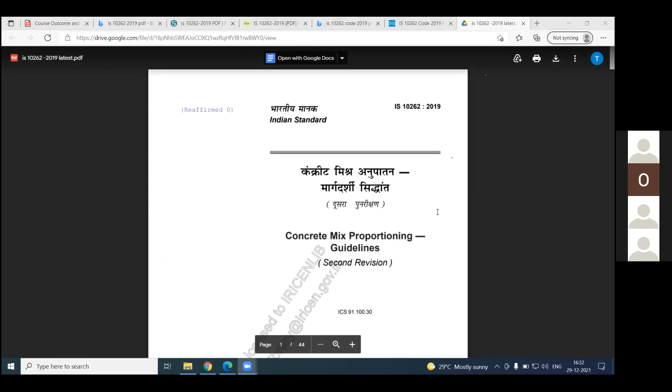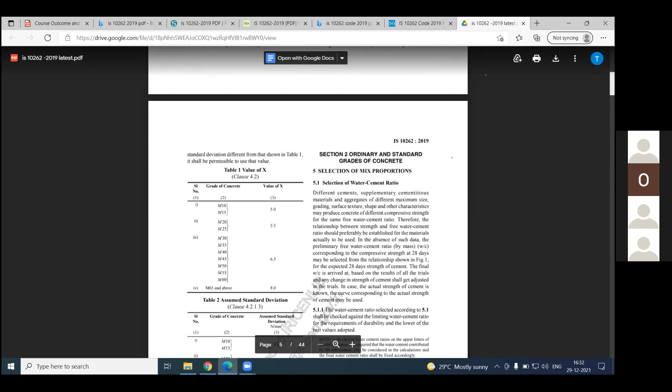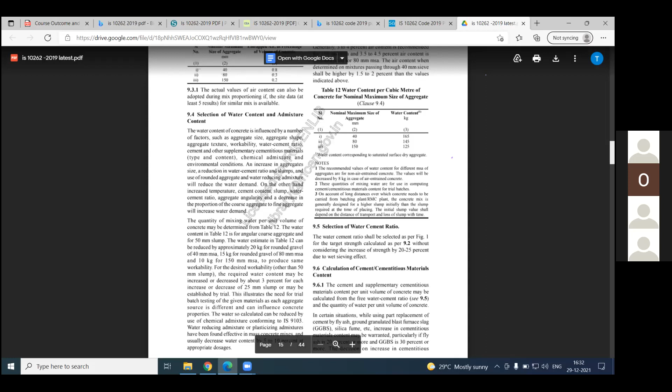Okay. For easy purposes, I have downloaded IS 10262. I will explain so you people can see easily. Wait a minute. I will show the main things, and the background things I will explain. Okay.

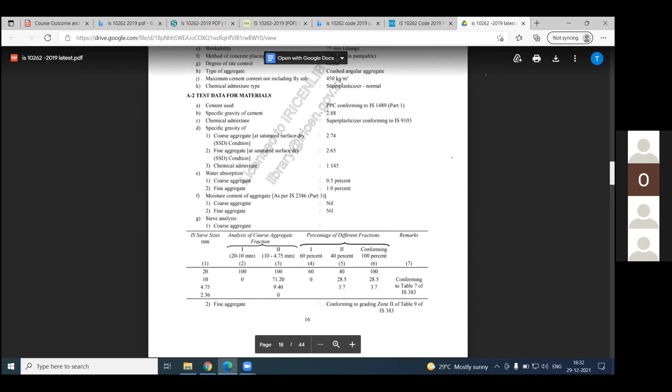Yeah. This is the main process for designing the mix design. First, we have to select the grade. After that, what type of cement we have to use, what is the maximum size of aggregate, whether it is heavily reinforced or not, and what slump is required. Slump will depend upon the time at which we have to pour the concrete, like 1 hour, 2 hours, 3 hours.

Based upon the time we can increase or decrease our workability, like slump. We can use admixtures for that. After that, what is the minimum cement content and what is the maximum cement content we have to consider. These are the main things we have to consider before going into mix design.

These are all things you will get in the IS codebook. What is the maximum cement content?

Maximum cement content we will use is 450, but in railway projects, some codebooks give a limit of 500. Minimum is 300, but it varies entirely between highway and railway. For highways, minimum cement content is 300. For railways, it is 350. It will vary.

After getting all the test reports of the materials, we should check specific gravity of the cement. We will get this for each material test parameter, including specific gravity of aggregates in SSD and saturation condition, admixture weightage, and water absorption of coarse and fine aggregate. Due to this water absorption, we can deduct or increase our water content. If there is a lot of moisture content in aggregate, we have to reduce our water content so that workability is maintained properly.

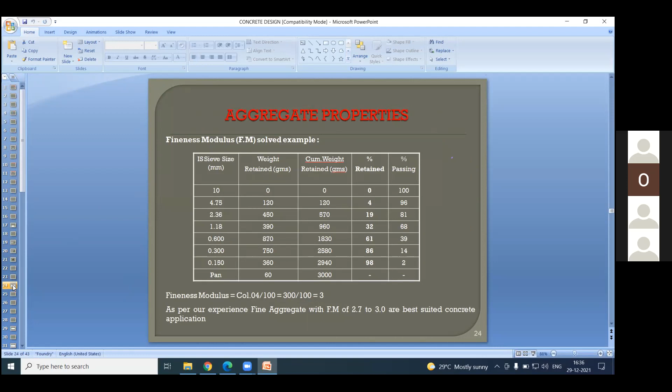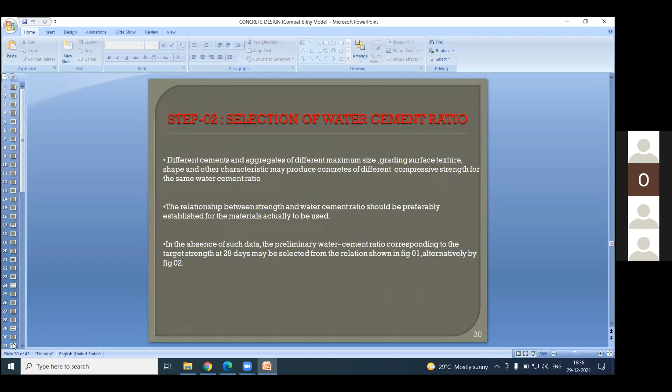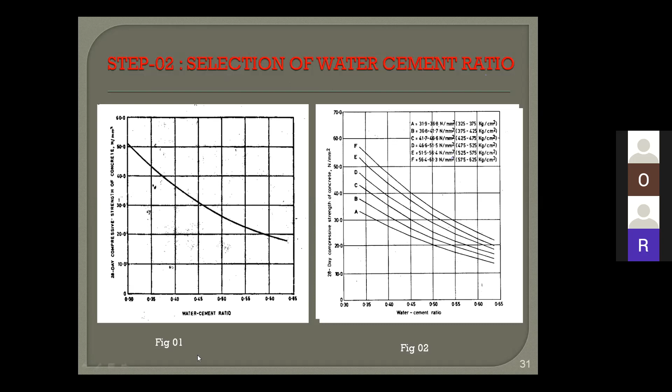The maximum water cement ratio we have to use is 0.45. Now we have the target strength of 42, and we plot it. This is the 42 we come across, and this is what we get here. After that, we go down so that we get the water cement ratio we can use. Here we get 0.38. So we fix the water cement ratio at 0.38.

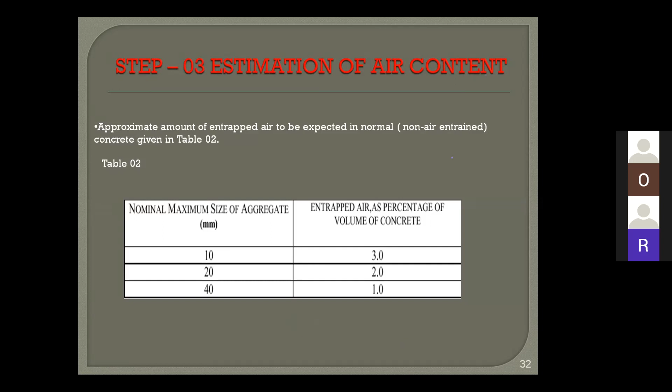Here we are using maximum size of aggregate as 20 mm. So we have to assume air content will also be there, about 2%. After that, we are assuming 20 mm as the maximum aggregate.

In the codebook, IS 10262, it is given that maximum water content we have to use is 186 liters. 186 liters is common if we are using maximum aggregate size of 20 mm; it is compulsory. But by using 186 liters alone, we cannot complete the mix design. The water content may be increased depending upon our material properties.

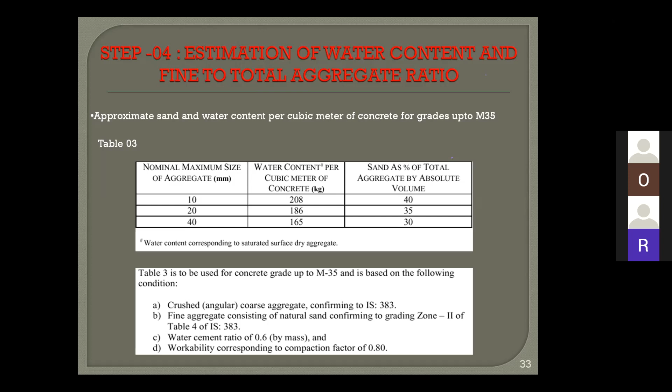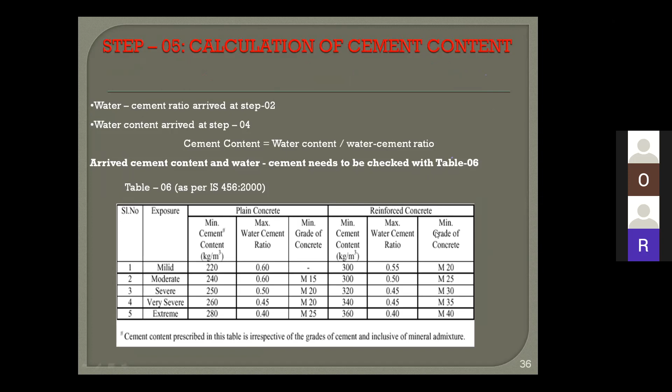These are the criteria we have to take. I have already informed you the minimum and maximum cement content for plain concrete and reinforced concrete, and their water cement ratios. These are some examples, but you can also see in some codebooks what conditions determine the type of mix design we use. These are the conditions.

Most of India is in moderate conditions, but we also have coastal regions where it is severe. For coastal regions, we design in a separate manner; the cement content and even the type of cement used will be changed.

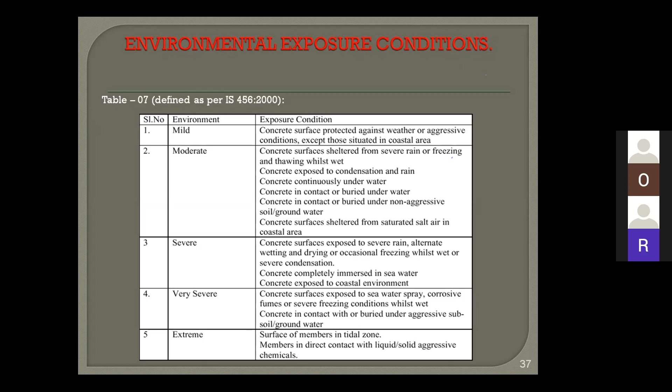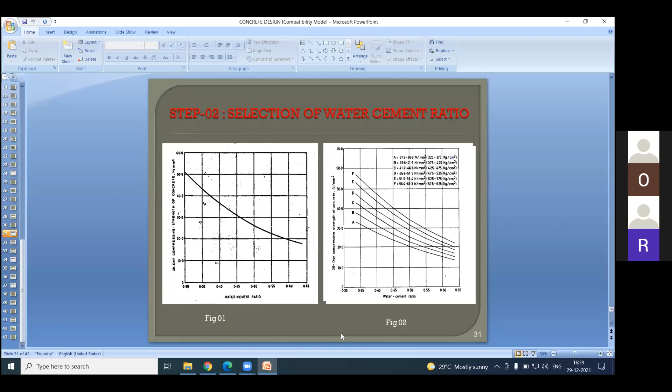Yeah, thank you. Yeah, I will come to here.

Then we have chosen the water cement ratio as 0.36 from the graph. After choosing 0.36, we have to find the cement content.

We have already got it actually. We are using 186 liters from the codebook. We got 186 liters of water we have to use for maximum aggregate size of 20 mm. You can see from table IS 10262 that 186 liters we have to use.

But this 186 liters is for 50 mm slump. If we want more than 50 mm slump, we should increase our water content so that we get more slump.

So how will we increase it? First, 186 liter is given for 50 mm slump. In the codebook, it was mentioned that for every 25 mm increase, we have to increase 3% of water. Here he wants to design for 75 mm slump, so we have to increase for that 25 mm, 3%.

So he calculated 186 plus 3 into 186 by 100. If we want 100, we should calculate 6 into 186 by 100. For every 25 mm increase, we have to increase 3% of water of 186 liters. So after calculating, we will get this value, and this is our water content.

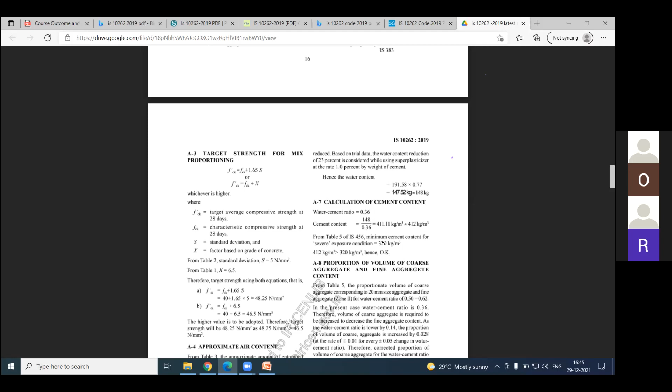You can see here 320. In some codebooks, they mention 300, 350, and maximum we are using 500, 450. It depends upon which codebook we are using and what work we are using it for. Depending upon the work also, some things will change, codebooks will change. In railways, we will use some codebooks, and compared to highways, we will change the codebooks. So we have to see all these criteria before designing a mix design.

After that we have already decided our cement content. We have decided our water content, admixture content, and cement content. Now we have to decide our aggregate, how much fine aggregate and coarse aggregate we have to use. In coarse aggregate, we are using two types: 20 mm and 10 mm. What ratios we should use, we have to calculate right now. Okay, for that purpose I will say.

Just before going into this, we have to consider we are using water cement ratio as 0.36 right now. For 0.3 we are having in IS 10262, it was mentioned that we have to calculate the volume of aggregate by using water cement ratio. But actually you can see here, for maximum size of aggregate 20 mm, for zone 2 type fine aggregate, we have to use water cement ratio 0.50 equal to 0.62. This is the condition given.

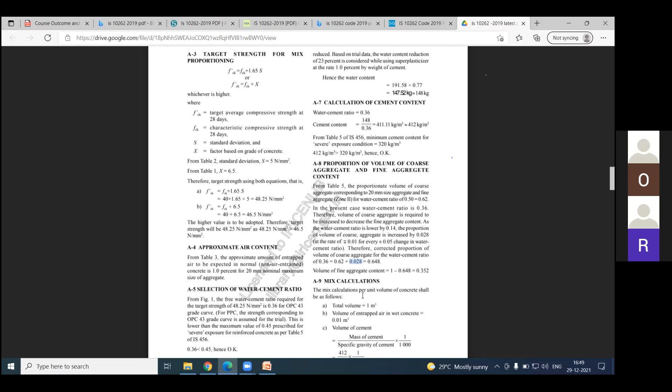Then, okay, total volume of the concrete mix design, what we will find out for 1 meter cube. Then you can find the simple calculations. Volume of cement: we know the mass of cement, what we got earlier, 412, divided by specific gravity of cement, into 1/1000. We will get the volume of cement for the 1 meter cube. Same procedure we will use for all the materials.

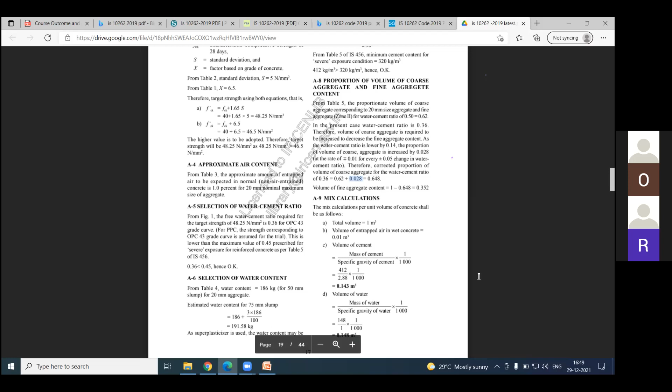Volume of water: mass of water we know, divided by specific gravity, into 1/1000. We will get the volume of water, and same for all the ingredients. For the volume of aggregates, for the volume of fine aggregate, we will use these. And for the admixture also, mass of chemical admixture by the specific gravity, which I already said. While doing a mix design, we have to get all the properties of the materials. We have to use the specific gravity of the admixture. We should know all the properties of the material before going to the mix design. By this we can calculate all the materials for the 1 meter cube.

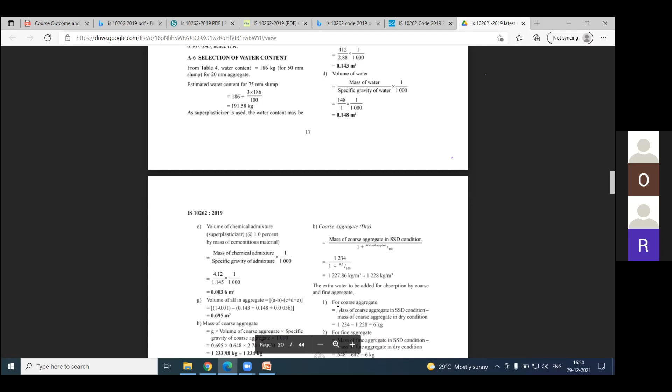After this, okay, this is the mix design process. I don't want to say much about mass concrete also and self compacting concrete, which is so nice - without using vibrators we can place the concrete. With actual concrete we can place at a height of 1.5 meters, but we have some problems: we cannot pour the concrete from a height of 1.5 meters, so we have to pour from 3 meters, 4 meters, and the material should be nice, it should not get segregated. For that purpose, in a congested area where we cannot do vibration, like pen vibrators, we cannot use them, so at that place we can use self compacting concrete. I will explain the self compacting concrete in future, how we will do it.

And I have published a journal also on that, and the mass concrete what we are using for dam constructions. I will show you in future some of the approved mix designs I got approved from the client. I will show you all these things, and I will show my journal also.

And after doing these mix designs, we want to test the cubes. We are dispatching some of the concrete to the site. We need to know how many cubes we have to cast, what process we have to follow for testing, how we have to do curing, for how many days we have to do the test, what parameters we have to consider while doing the test, what rate of load we have to apply for the destruction of the cube in compressive strength, and what type of compressive strength test we can use.

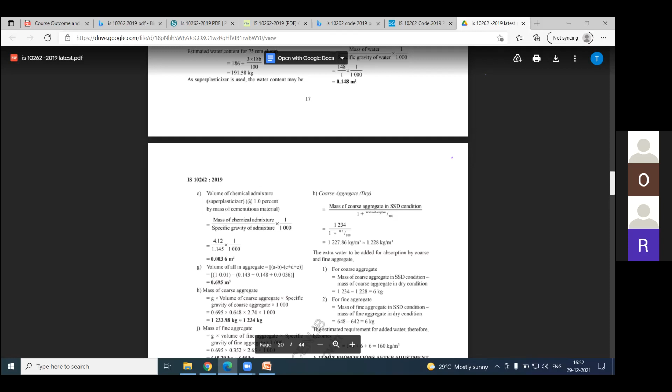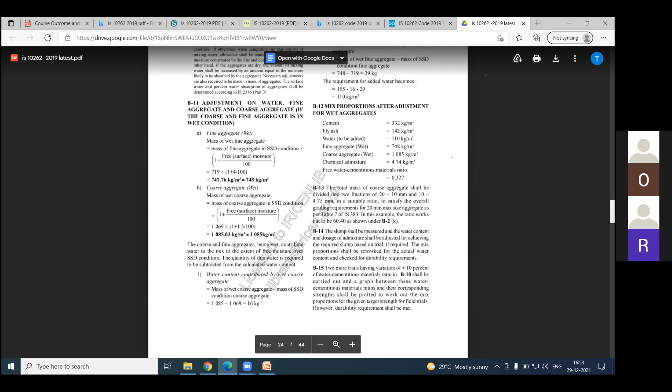Sir, can you explain again the superplasticizer portion? Okay, I will explain. First, we will fix the water cement ratio. I will show you, it will be easier for you rather than telling like this.

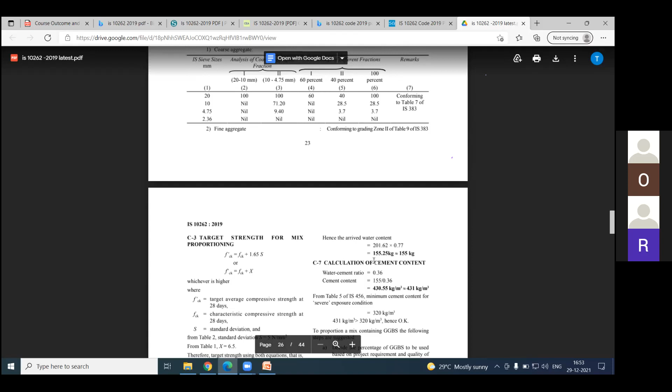Okay, I will come from the water cement ratio. We have to fix the water. For 20 mm maximum aggregate, water is fixed at 186 liters for a 50 mm slump. But as I said, for every 25 mm increase in slump, we need a 3% increase in the 186 liters. If you want 100 mm or 125 mm slump, you can calculate based on that. For every 25 mm increment, increase the water by 3% of 186. Then you will get the water content.

After getting the water content, by using this water content we will get less strength. As I said already, if the water content is more, the strength will obviously decrease. If we want more strength, we should decrease our water content. To decrease our water content, we need to use admixtures. How we will fix the admixture percentage, we will decide here.

First, what water content did you get? 201.62, from our calculations. First use this only for the trial mix. Use this water content and go for the slump test. Then see what slump we are getting for a particular time. From my experience, it will get segregation due to excess moisture. So we have to decrease our water content, and to do that we are using admixture.